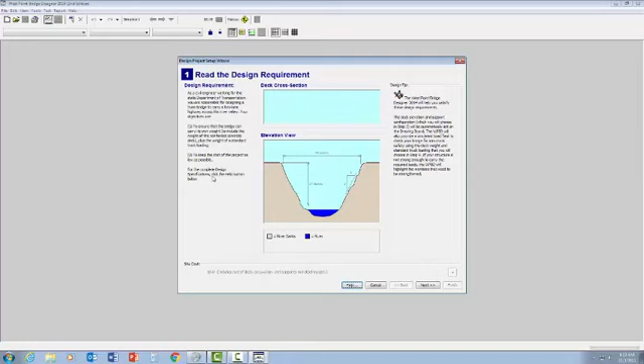You do not want to enter a contest. And we're on number 3 here.

It's going to ask us a couple different questions. What do we want to do? Do we want to change the deck elevation? For what we're doing, we're always going to leave this at 24. The abutments and support configuration may change, refer to the sheet for that. No pier, 2 piers, or 2 spans, I mean. So just refer to the sheet for what you should be clicking on here.

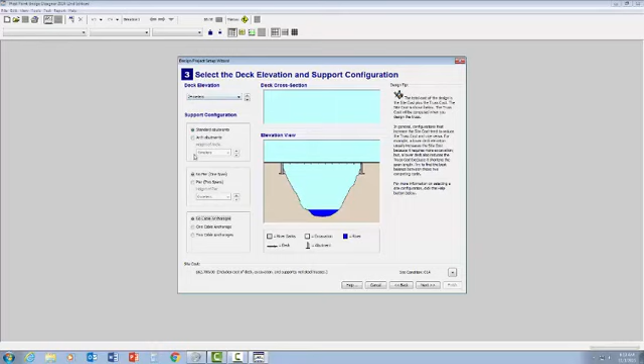But for the first one, we're going to leave everything the way it is. Hit next. Medium strength, standard truckload. Number 4 never changes, and we're going to do the first one, which is the through truss, the Howe style.

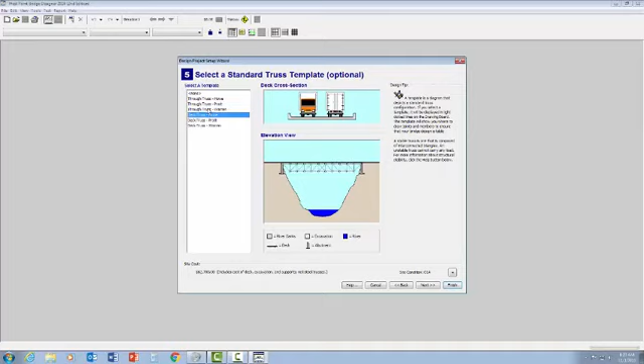Okay, and if you click on these, you can see that they change. The picture in the center here will change depending on what you click. So we're going to do the first one. I'm going to do next.

Design by - put your name in there. Click next. It's going to tell you what to do, and I'm going to walk you through that as well. Hit finish. Okay, so in the upper left hand corner here, these are your tools.

You've got your joints, and you've got your members, you've got your selection tool, and you've got your erase tool. The joints are just what they sound like. These circles here go where these circles are here. Here's the funny part - these ones you don't have to put in. They're already there for you, but these ones are not.

So what you want to do is select the circle tool, the joints, and just click over top, and it'll automatically snap to where it's supposed to be.

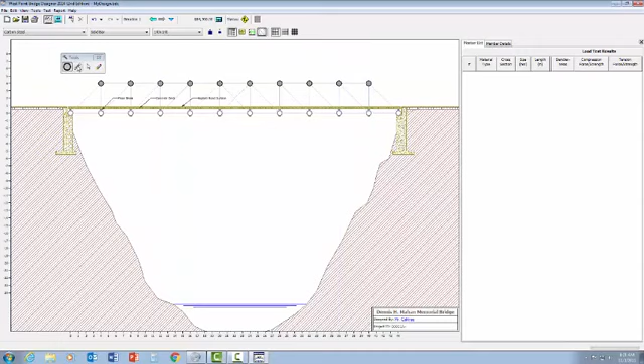Once you've done that, you can grab your member tool and then just hold left click, drag, release, left click, drag, release, and do that for the whole thing. You must connect each one of these individually. Okay, this takes a little bit of time, but you can do that.

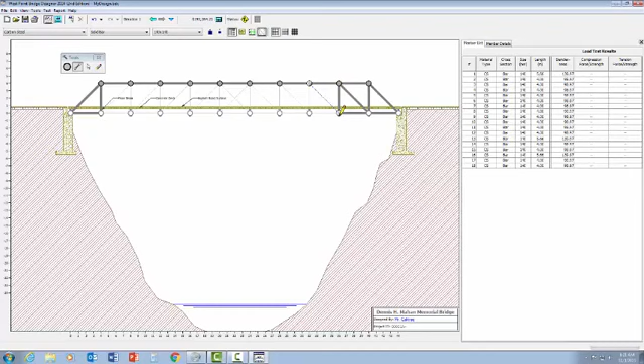Okay, if you happen to make a mistake, like you do something like that - oh boy, I didn't want that - grab the little eraser and just click on it. Okay, and then, okay, so now we have our bridge.

It is fully constructed. We're going to use a couple things up here. Remember, the whole point of West Point Bridge Design is to create a bridge for the lowest amount of money.

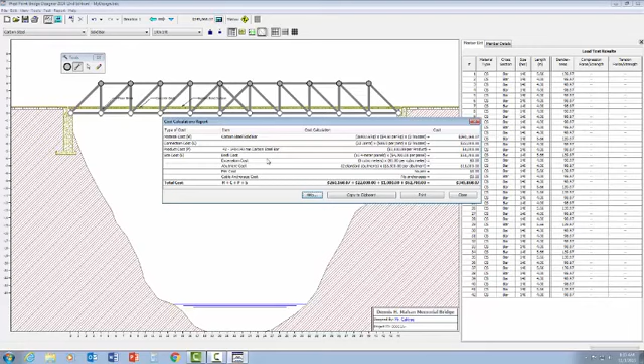So up here is our calculator. You can click on this if you want. We're not going to be using this, but it just kind of tells you how they estimated that cost. If you want to, there's really no need to. But I do want you to keep in mind to just look at that, just so you know how much your cost is. So right now it's

$245,868.07. All right. Up here we're going to have 2 different windows that we're going to use. This is our test window, so if I click on this, it's going to automatically test my bridge. All right, and you can see that these are colored. Okay, this is red, this is blue, and notice how this bent.

Okay, that means that it failed. Here's our truck over here. Our truck is trying to make it all the way across, but obviously the bridge failed before the truck could ever get there, so it's not going to work.

So we want to click back up here, see where it says, right next to the little blue window. Click here, and what it does is it gives us a couple different windows here. The first thing is, if you notice all the red, okay, the red is compression. And if you look over here on the right, the member list, everything that's listed in red here represents everything that's red here.

And if I click on one of these, it automatically highlights it here. So this is number 8. Okay, it even says 8 right there.

If I click on this one that's blue, it highlights number 32, but look, there's a different color for 32 - it's blue, that is tension. Okay, so that's being pulled apart.

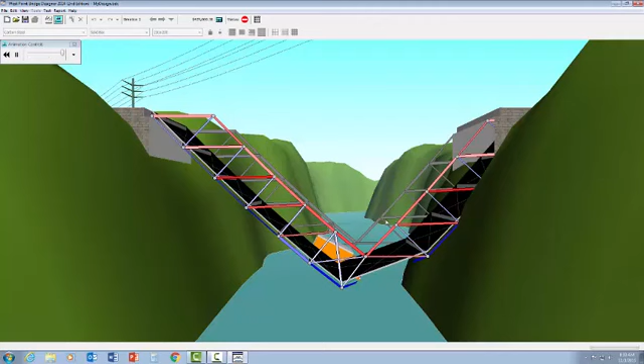So what do I do? I test it. Test my bridge. Okay, so it seems to work right now. Oh my god, it broke. Okay, that's not good - so we see that it broke. Let's go back up here.

Okay, we're going back to our design board. And look, now we've got one piece here that failed catastrophically. If we click on here, it's actually at 1.03, so it just failed. So let's click on that and make it a little bit larger. Okay, I just made it larger by clicking on this.

Okay, watch it go across, and it worked. Cool, awesome - so my bridge now works. But here's the thing, I'm at $427,000. The question is, can I make this bridge cheaper? By cheaper, I mean can I make some of these pieces smaller? They don't need to be this big.

So one thing you can do is come over to the compression and tension, and this is why you need to be able to use this right-hand column. I can click on this, and it'll sort them by how much they're holding. So if I click over here, I can see these are all zeros. It's fine, but just because these are zeros doesn't mean they're going to stay zeros. Remember, one of these has to be as close to 1 as possible.

So by making this piece, which is number 2 - remember number 2, I click on it here - a little bit smaller by clicking the decrease member size, I'm actually going to make it weaker, but I'm also going to make it cheaper. So watch, if I click this, my price goes down a little bit.

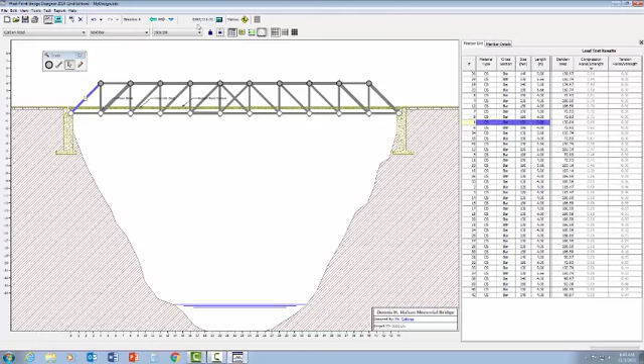Let's make it smaller again, bring it down by 2 more. Remember, every time I make it smaller, I make it cheaper. The point is to make the bridge as cheap as possible, but still functional. So let's run the load test.

You can tell when you're running it how dark of a color it turns - this is really red, so it failed. Wait, let's go back. Wow, okay, so number 1 is at 1.08.

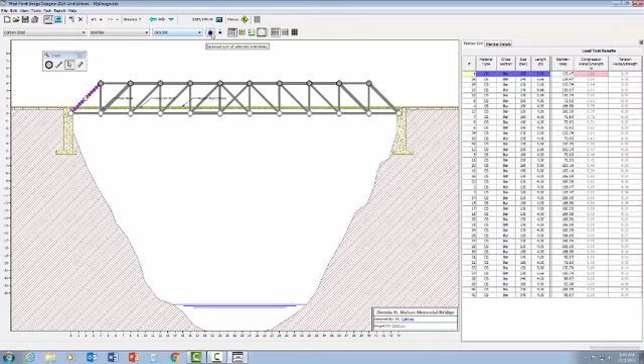So since it's already selected for me because it's the last one I worked on, let's just make it 1 bigger. And yes, making it bigger does cost more money, but I still need the bridge to be functional. So let's run the load test again.

And it works. So I now know that number 1 is now at 0.85, and that's about as thin as I can make that. Here's the way West Point bridge design works though: your entire bridge is affected by the other pieces. So if you make something else smaller or larger, it will affect the rest of the bridge - that's what makes this a challenge.

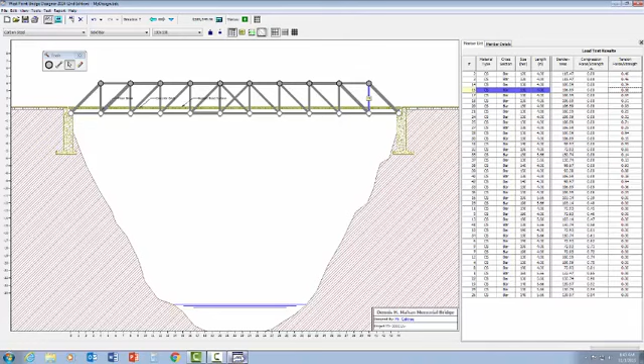My advice is that you figure out which ones are very low in number, meaning they're too strong, and make them weaker, thereby making them cheaper. The point is to make the cheapest possible bridge that can still get the truck across. And that concludes this tutorial of West Point bridge design.